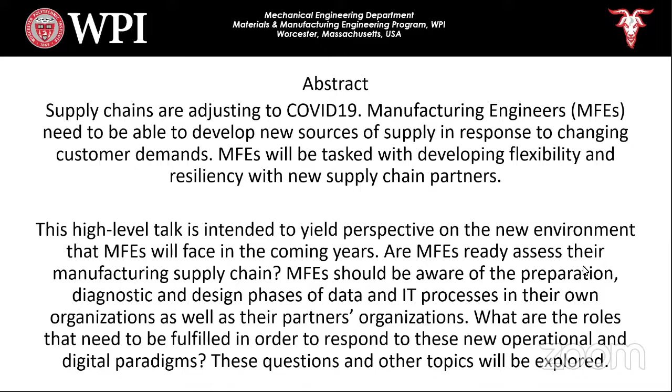Hi everyone, thanks for joining me for my talk today on what do manufacturing engineers need to know about digital scaling in a manufacturing supply chain. So here's the abstract for today's talk. Much of the material shown in this presentation came from the global consulting firm McKinsey & Company, and also the World Economic Forum and the Wall Street Journal, and there's some academic publications. I have a personal rigorous reading schedule of newspapers, trade magazines, and academic papers in order to stay current with both industry and academia, and I recommend that you do that as well.

So this talk has three main parts. The first provides a lot of current thinking on the best manufacturing companies in the world and why they are some of the best manufacturing companies in the world. The second part is about your ability to recognize opportunity for digital scaling in manufacturing. And the third part focuses on some skills that you can learn at WPI to support your career.

So over the past couple of months, on the front page of the Wall Street Journal, there's been many stories about COVID-19's impact on the world, and frequently manufacturing companies are highlighted. Very few manufacturing companies have escaped a significant downturn unless they were directly involved in the healthcare supply chain.

So we don't know who the winners and losers are going to be in the future, but many companies have had to change their product offerings and manufacturing processes to respond to a drop in demand in one part of their business and new opportunities arising in other parts.

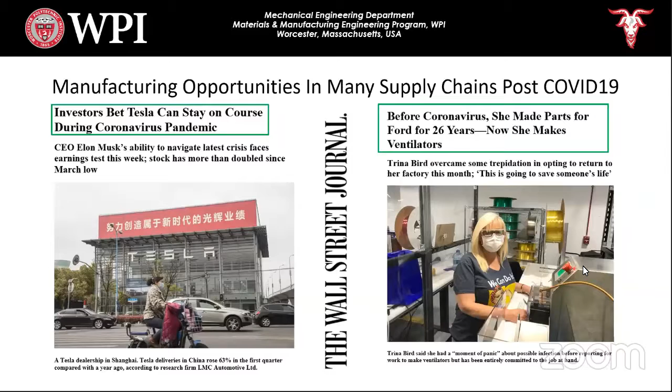The main idea in this talk resulted from articles on manufacturing lighthouses, specifically global digital manufacturing lighthouses. Digital manufacturing lighthouses use fourth industrial revolution technology deployed across substantial elements of their enterprise, using the Internet of Things and workforce reskilling and upskilling to increase manufacturing capacity and quality by large increments. Many manufacturing companies would be happy to grow at 2 or 3 or 4% a year, but digital manufacturing lighthouses attempt to increase sales and drive productivity gains in the order of 10 or 20 or 30% a year.

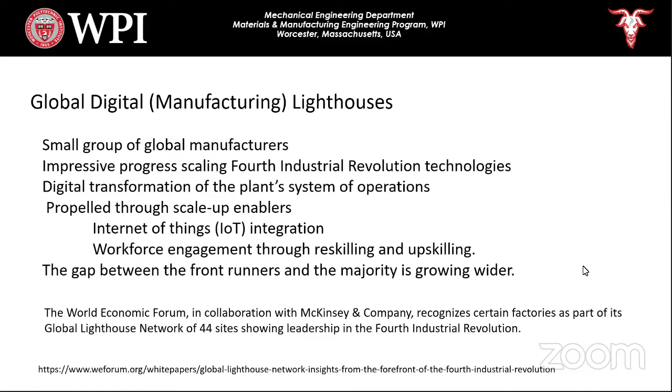This white paper was produced by the World Economic Forum in January of this year, focused on 44 global digital manufacturing lighthouses. This particular paper focused on the potential productivity increases in Western Europe as compared with the rest of the world, but all these conclusions can be extrapolated to any geographic area or country.

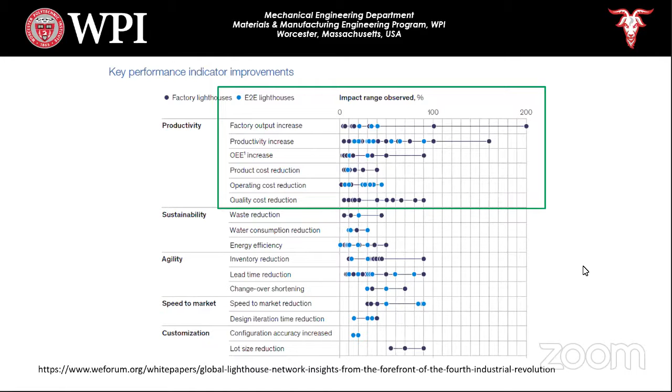So what might be of interest to manufacturing engineers is the results of becoming a digital manufacturing lighthouse. It shows that productivity in the output of the factory, or internal productivity, or overall equipment effectiveness, and the cost of quality has been reduced substantially, and they get operational and financial gains for these companies. If you look at all of these different capabilities, being able to drive bottom line because they're more efficient internally is really the biggest gain that you get from becoming digitally enabled, or more digitally enabled.

So I have a lot of examples that I pulled out of the paper that I thought were pretty interesting and applied directly to manufacturing engineering folks. The paper has a lot of detail on a company by company basis, and I just have a few slides of interest to MFEs.

The study shows the before and after thinking at each of these global manufacturing leaders. Worker empowerment is evident in many organizations where the product and process innovations are driven from within the company by the people that are responsible for the process. This thinking fits very much with lean process improvement, where top-down management command and control generally leaves the operation sub-optimized. The people that are closest to the process, which could be you as a manufacturing engineering person after graduation, are the experts when they're given a voice in company operations, and the results that you can achieve can really be impressive.

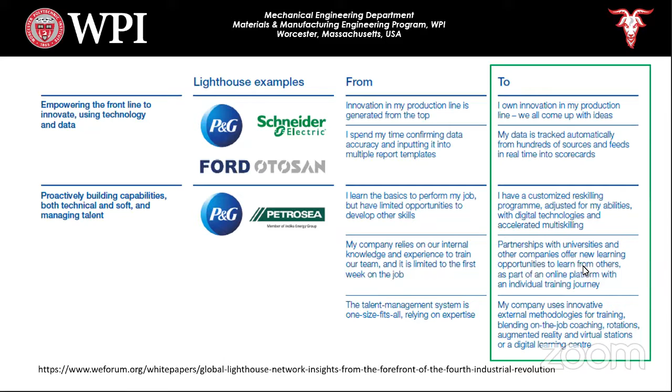Taking one example from this slide: I own innovation in my production line, we all come up with ideas. So who exactly are they referring to? Well, they're referring to you, the manufacturing engineer, as well as the other participants in the manufacturing process, to drive improvement from the bottom up.

This slide shows another group of well-known companies across a cross-functional team that facilitates change regarding companies' digital processes.

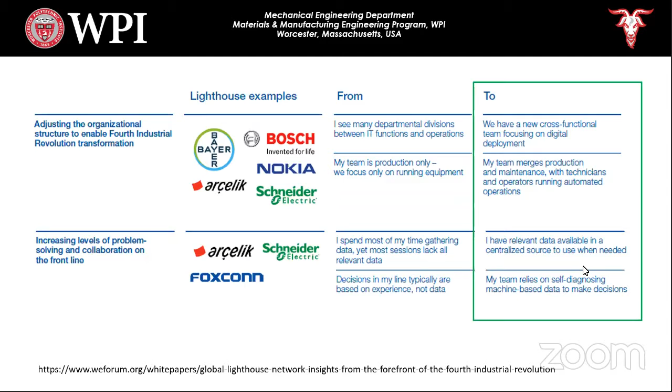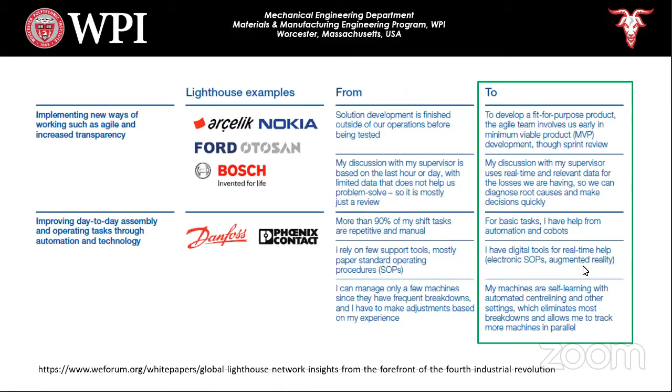Production line problem solving is pushed down to the lower levels of the manufacturing team so that data produced on the production line can be acted upon directly without much upper level management involvement. Fewer layers of management needed to resolve a problem produces higher productivity gains. This reinforces the real-time use of data from manufacturing to do root cause analysis and make modifications to the production process without upper level management involved. None of this would be possible without gathering data from the manufacturing process itself and integrating it with customer requirements and customer demand data.

Another area where digital scaling has an impact on manufacturing is producing digital production optimization. Manufacturing engineers, who may or may not be located near the production system, are able to interact with a digital twin of a part, an assembly, or a final product that's undergoing processing, make adjustments, and transmit that to the manufacturing floor in real time.

The other highlight in the slide shows the connection of machine level data with enterprise software. This has been going on for a lot of years. In my last talk I gave, I talked about the integration of sensors into legacy machines so you can find out how your CNC mill is doing at any particular point during the process. It's only been a recent development that you could easily retrofit this data collection into legacy machines, and all of this is connected to the enterprise resource software, the ERP that runs the company and helps whoever's flying that plane, essentially running that business on a day-to-day basis.

They've got a set of gauges, and those gauges are telling them: are we making money at this point in time? Where are my production problems that I'm anticipating? Do I have maintenance issues coming up? So you're entering manufacturing at a really new type of environment compared to the one I grew up in.

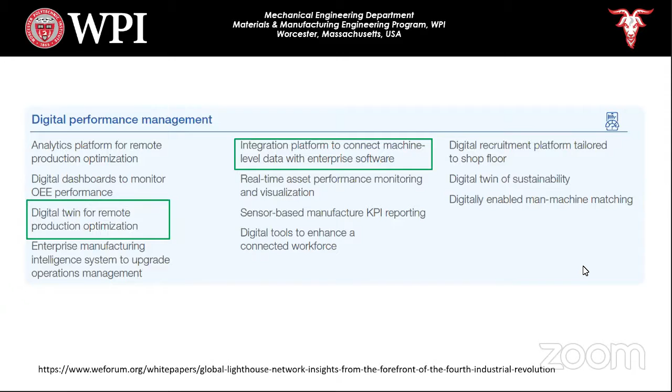Industrial engineers need to know that 100% inspection is not only very expensive, but not necessary if you use sampling techniques and process control charts. But if 100% inspection was able to be performed at essentially no cost, you'd really want to do that, because you'd have great data collection on what you produced, on a per-part or serialized basis.

So automated inline optical inspection allows these digital manufacturing lighthouses to capture data on essentially every component they manufacture within the four walls of the company. This is another example of Internet of Things enabled manufacturing quality management.

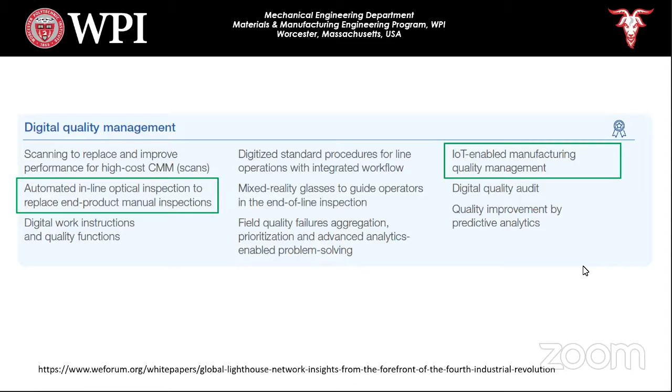Off-the-shelf sensors for every conceivable metric you would want to measure in your manufacturing process are available today, and many of them come with either ethernet or wireless connections that you can directly connect to a company's intranet.

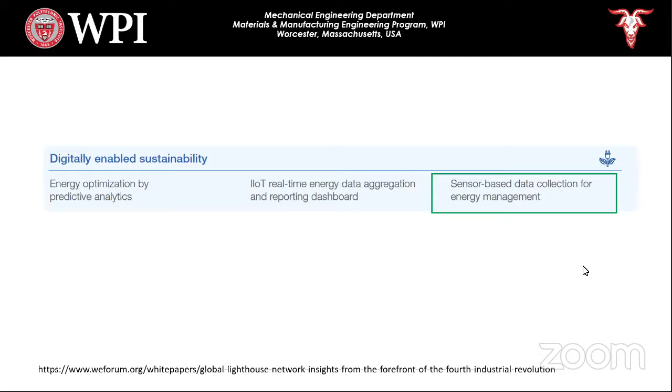A new term appeared in this company for me: digitally enabled variable takt time. That's really amazing to think about, because takt time generally tends to be really static—can I match my customer demand rate to my production rate, which might slowly go up and down. But this is saying you have the ability to match the customer demand rate in real time to manufacturing, to modulate your setup, run times, and run quantities to coincide with changes in the product in real time. This term was really cool when I saw it.

Tool and die manufacturing can be significantly reduced using digital methods in-house or across the supply chain. They didn't have a lot of detail on that.

Then we have Kanban, a Japanese word that means signal to produce. Some basic examples could be an empty box transferred back upstream through the manufacturing system to be filled by some upstream person or machine. But there are other examples, like taking masking tape and putting it on the factory floor, the size of a car. If there's a new Ferrari sitting in that taped-in box, we don't need to make a new one. But if the tape box is empty, then we need to make a new one. So the signal to produce is much larger than just our traditional thinking of sending empty boxes back upstream.

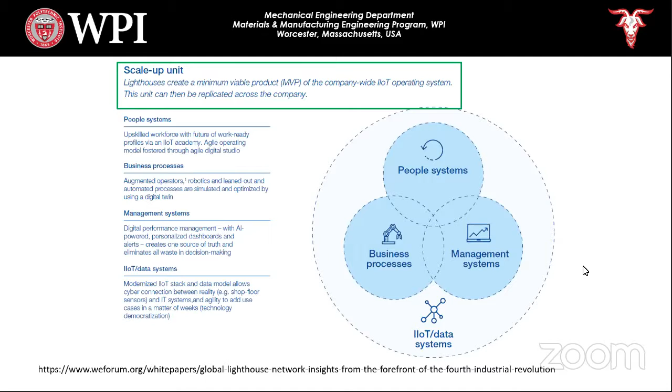If we take another look at the air conditioner manufacturers, sales are not considered to be a one-time event, but repeat sales will be developed from any particular customer due to these digital connections made by the interaction between the customer and the factory.

This type of interaction between producer and customer is very difficult for competitors to break into once that connection has been established, provided that you're satisfying the needs of the customer. The customer would say, why would I ever want to change and go to another supplier? Even cost sometimes isn't a factor, because they're willing to pay more since the value of guaranteed delivery in a short period of time, or customization in a short period of time, will trump the cost of providing it.

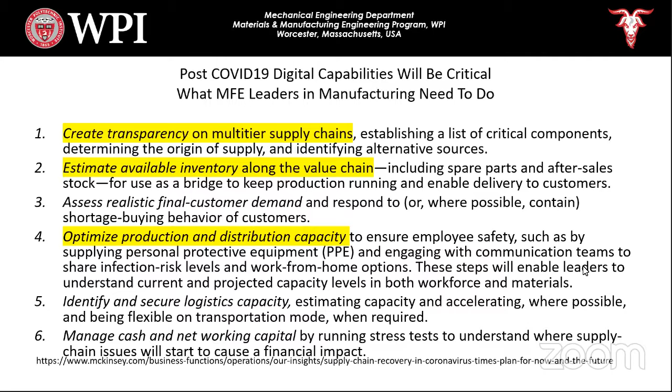So manufacturing engineers tasked with a digital scaling opportunity can model their impact in four steps, and it may fall to the manufacturing engineer to understand what data and information technology may be used to eventually facilitate these waves of digital transformation spearheaded by the manufacturing engineering group, department, or person.

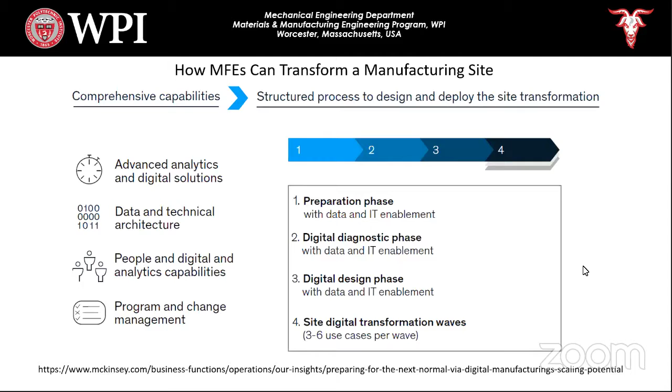So this might be the most important slide in the whole presentation. Manufacturing engineers need to understand they are the translators that identify the opportunities and facilitate the development of these opportunities on behalf of the company.

The digital engineers and information technology people are really unlikely to have deep manufacturing process knowledge. It's your responsibility to foresee how a manufacturing process can be used leveraging all these digital tools. So you essentially come up with the idea and say, this is what I need to happen, and the rest of the organization supports you. But they're not necessarily going to come up with these manufacturing ideas because it's just not something they've had a lot of training on.

Manufacturing engineers should be able to calculate the value retained in the company as a result of their participation in the scaling and rollout. That's a common theme running through all my courses: can you describe, from an economic point of view, the value of your work and what you bring to the company? Every single course I teach, grad and undergrad, has that built into it.

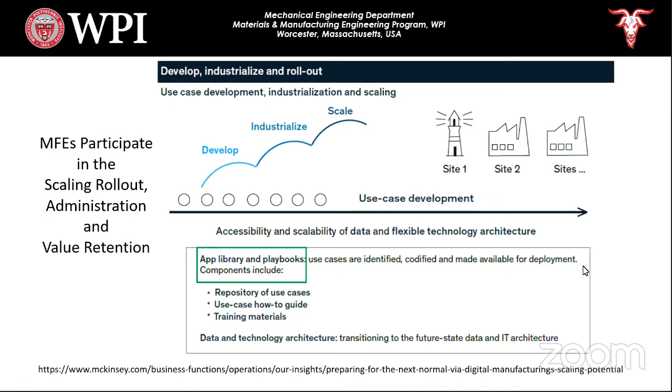Manufacturing engineers should be aware of, supporting, and leading the digital center of excellence in their organization. You may have to be the one that creates the digital center of excellence, because they haven't thought that they needed one, but you're going to need that in this environment going forward after you leave WPI.

Similar to a Six Sigma black belt, where these highly skilled engineers are able to reproduce substantial financial gain through productivity improvements in multiple iterations, the manufacturing engineer can deploy digital scaling in multiple iterations across the manufacturing organization.

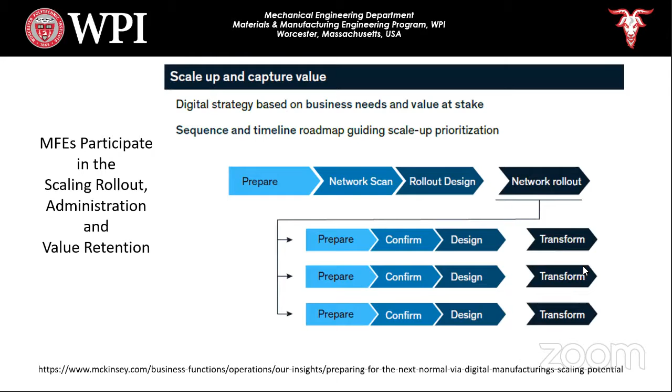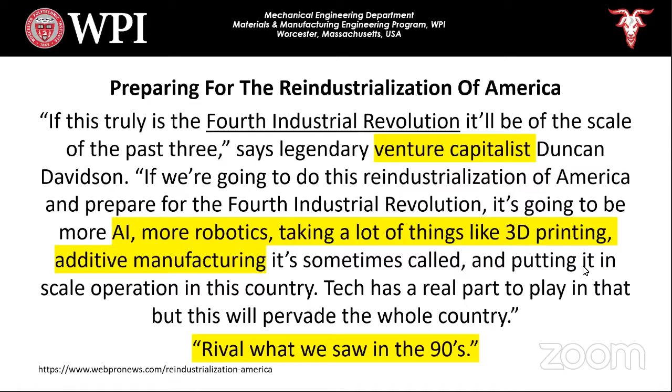You could meet with a group online for an hour for coffee, on a regular basis. I actually do this now. I have a group that I meet with and we talk about solving some interesting challenges that are manufacturing oriented, and we've been going at this for quite a while.

I don't know if you're familiar with this book. When Professor Brown teaches MFE580, the book comes up in the slide deck, but it's tough to get and expensive. I have a copy signed by Dr. Suh.

If you've had me in the operations class, you've heard me ask, how do you become the smartest person in the room? My answer is by being correct about problem solving most of the time. Well how would you do that? You need to be proficient at problem definition, because you can solve any problem, but defining the problem is usually where the big challenge is.

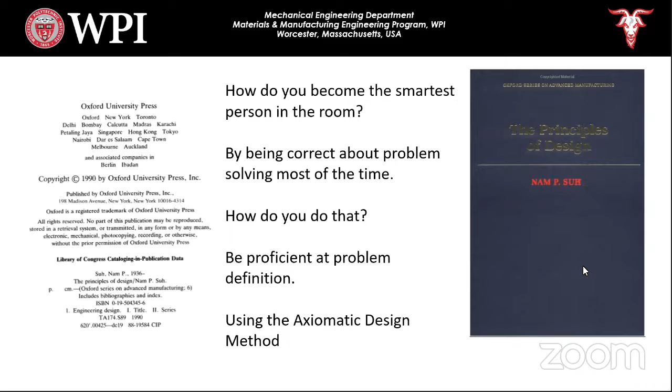So how do you become proficient at problem definition? Well, you can use the axiomatic design method. This is the table of contents that happens to be in the book, The Principles of Design. And if you look, the 9th one, this is kind of interesting. You have this design book.

And Nam is definitely a mechanical engineer. He's designed engines and electrical systems that propel mass transit vehicles. The guy is really a hardcore engineering person, right? But here's this book called The Principles of Design, and he's talking about designing an organization which has people in it. And if you're tasked with designing a manufacturing system, you not only have to think about how many strokes per minute or how many chips are coming off, and how fast am I burning through my tooling.

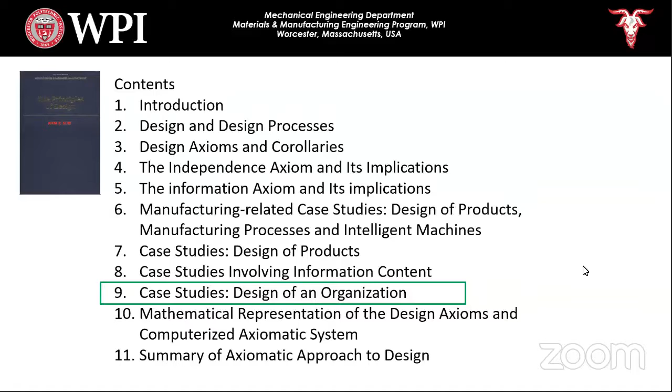And various industrial engineering concepts like looking at bottlenecks and things like that. But you've got this support system of people and information that supports all these various manufacturing processes, and they're largely invisible. When you walk out into a factory floor, you don't see all the stuff that happens in the background that enables this process to take place. And so when I first studied axiomatic design, I was really intrigued that here's this mechanical engineering professor from MIT, and he's talking about designs of people organizations, which was really fascinating to me.

So Nam wrote the second book, called Axiomatic Design Advances and Applications. And if you take a look at the table of contents, he continues more on design of systems and design of manufacturing systems in particular. And so if you are in a graduate program or a PhD program here at WPI, understanding the fundamental ideas in the axiomatic design method is not a trivial matter.

It is one of the most, if not the most robust problem-solving methods that I've ever encountered in my career. And you can apply it in a very formal sense using the Acclaro software out in the field someplace, or you can do it really informally. You grab a pen and paper, draw a couple of boxes, and you don't even tell the people that you're looking at FRs and DPs. It's talk about goals and how to achieve them.

But the framework of understanding how the system you build and the way you're fulfilling the goals, if you have interactions between the goals and the way you're fulfilling them, potentially causes a lot of problems in your system. And we've seen some of that. I have an example coming in one of my last slides about the meat packing industry, which happens to be a manufacturing system. Whoever designed how the meat packing business works, they missed a couple of key FRs and the DPs that they use.

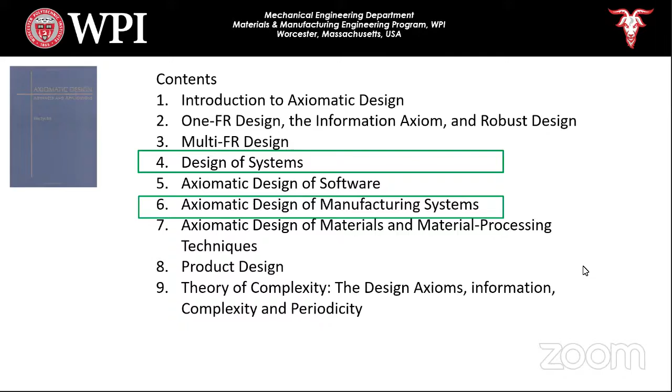And so now I've got this national problem with them potentially shutting down, right? So what inherent risks are built into various manufacturing supply chains? The reason I mention this is I don't think you should blindly go off and say, well, we can just add all kinds of this digital technology onto a manufacturing process and scale it up. Professor Towner said we could scale it up, or the World Economic Forum said we could scale it up. There's all these examples. And even the examples I showed you today from World Economic Forum and McKinsey, they've got inherent risks built into these systems that are going to appear at a very inopportune time.

And they may even be experiencing them currently. So I advocate for you to just do a really great job on problem solving so that we don't miss something.

So much of the US meat industry, which happens to be a manufacturing system, is predicted to shut down without government intervention. There's a quote from a professor at University of Notre Dame that explains why: meat needs to be kept cold, and you can't have a large amount of inventory in the system at any one time, because it wouldn't be fresh meat anymore. It would be either frozen meat or meat you wouldn't want to eat.

The CEO of a very large pork producer out in South Dakota has been on TV saying that this manufacturing system they run, although he doesn't use those terms because he doesn't think of it as a manufacturing system, but it is, needs someone to change the underlying ground rules for them in order not to come offline. Could they have anticipated that and made other arrangements years ago?

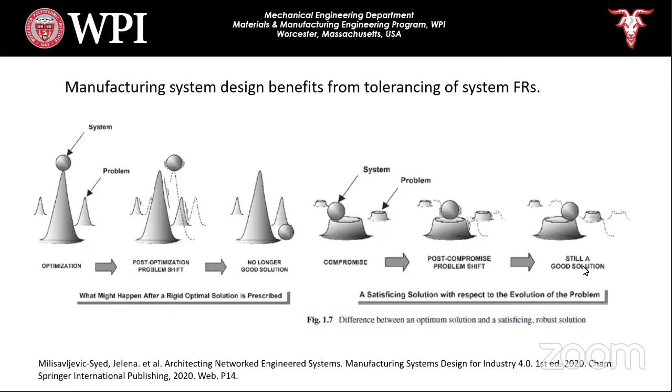Okay, so getting back on track to the digital scaling thing. I hope that you're able to recognize, imagine, and synthesize opportunities from your manufacturing engineering education and apply them in a real manufacturing environment. But we also want to do a good job to have elegant and robust solutions to your manufacturing system design.

One excellent way to do that is to follow the axiomatic design framework as you're designing your digital manufacturing system. This will help prevent problems from developing because we didn't build any tolerances into our system. And when it starts to perform in unforeseen ways, the system is robust and will continue to function, versus what is happening in many supply chains we see across the globe today.

One of the things you could do to help yourself is grab those publications that I put out there, the one from the World Economic Forum and the one from McKinsey, and take a look at them, because you're going on to that world, and I think you want to have a good idea about how other people see the world.